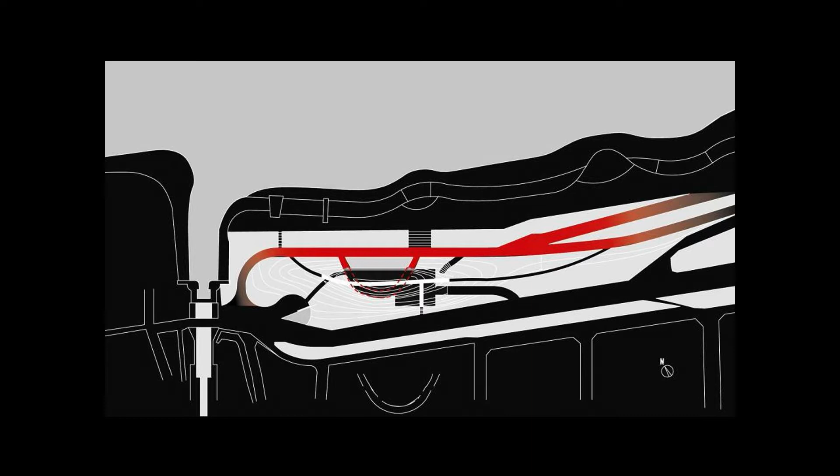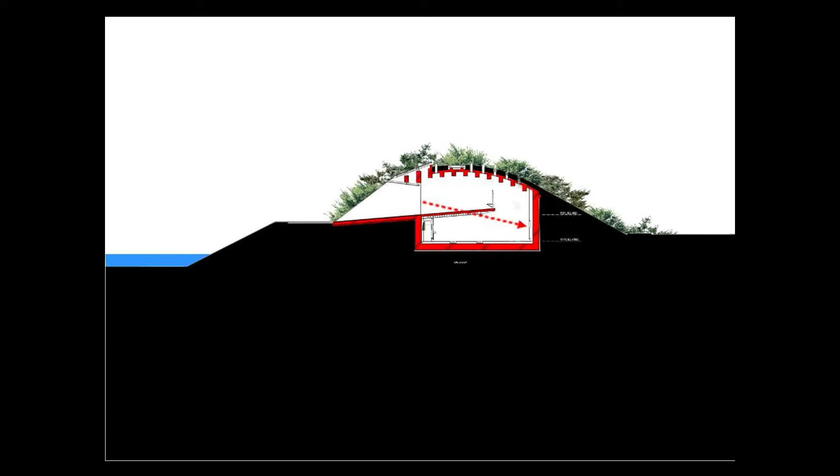The first project is a small museum, but it is difficult to find, because it is a small museum. Actually, half of the building was buried in the bank beside the river. The planning is very simple: it's a small tunnel, and the tunnel works like the museum. How to create harmony with nature is very important for this, because I didn't want to build a concrete box on this beautiful site.

The entrance is like that, but the problem is the taxi driver couldn't find the entrance, because I tried to hide it. At the beginning, even the taxi driver couldn't find it. They asked me to design a big billboard, but I refused. No, this should be quiet.

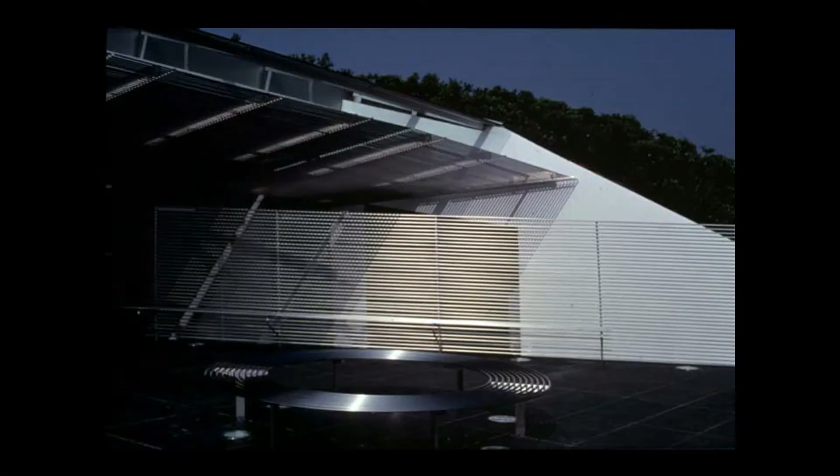This is the small plaza in front of the river, and this is the bottom of the building, a small exhibition space. I think the protagonist of the project is the river, not the building. The building should work as a frame for the river.

The next project is the Hiroshige Museum. Hiroshige is the name of an artist in the 19th century, an ukiyo-e artist. The basic idea for this museum is to use local material. The wood came from the forest behind the building, and I also tried to create a relationship with the town and the mountain.

The mountain behind the building is called Satoyama, a village mountain. It's a small mountain, but the village people's life was totally supported by the mountain. The material came from the mountain, and the energy came from the mountain. They couldn't live without the mountain. This happened before the 19th century.

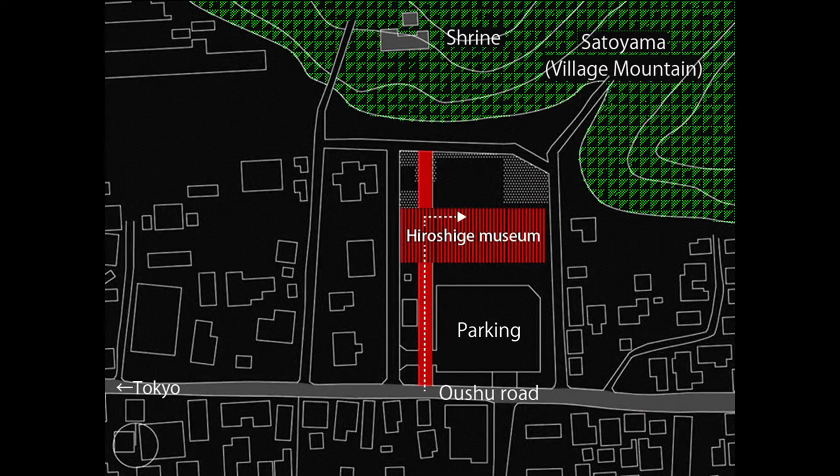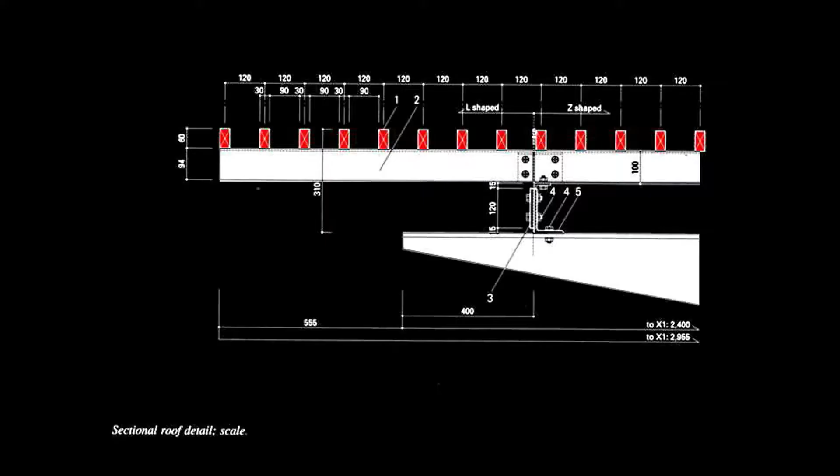Besides that, we tried to use local material as much as possible, avoiding material from Tokyo as much as we could. The wood came from the mountain behind, and for paper, we found a very good paper craftsman in the village. We worked with him to make the paper walls, and the stone came from the small quarry of the village.

The superimposition of those transparent layers was the theme of that design. And bamboo is a great material that I like.

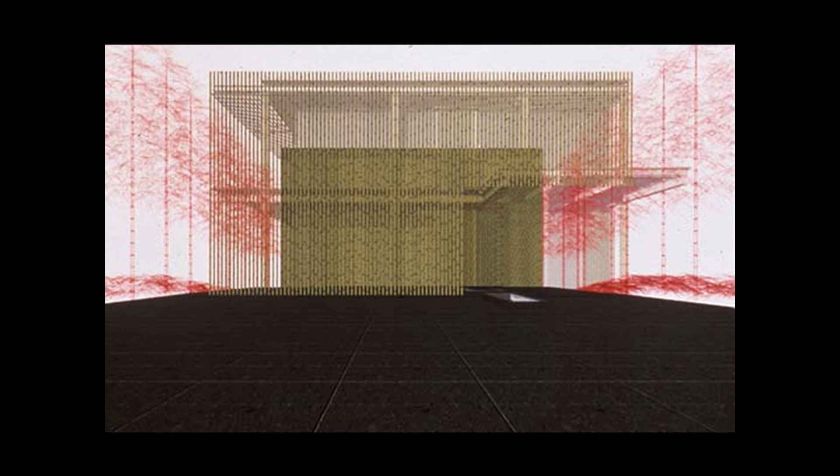It's a small bamboo house in Japan. It's a structural system, so we did use the bamboo for the formwork of the concrete. We injected the concrete into the bamboo, and we always test those mock-ups.

This is a small bamboo house. Forget the neighbors—for neighbors, typical Japanese houses, but forget it. The floor is like that. Walking on the bamboo is very, very comfortable.

The next project in China is a bamboo house besides the Great Wall. The Great Wall is behind the building. But at the beginning of the project...

I was worrying about the taste of Chinese people, because Chinese people like bigness. Still, Shanghai and Beijing are building big towers, but contrarily, I proposed a low silhouette building merging into the environment, and in that area I didn't cut the landscape. If we cut the land, the forest disappears. But I tried to keep the landscape as much as possible, and the bottom of the building follows the landscape.

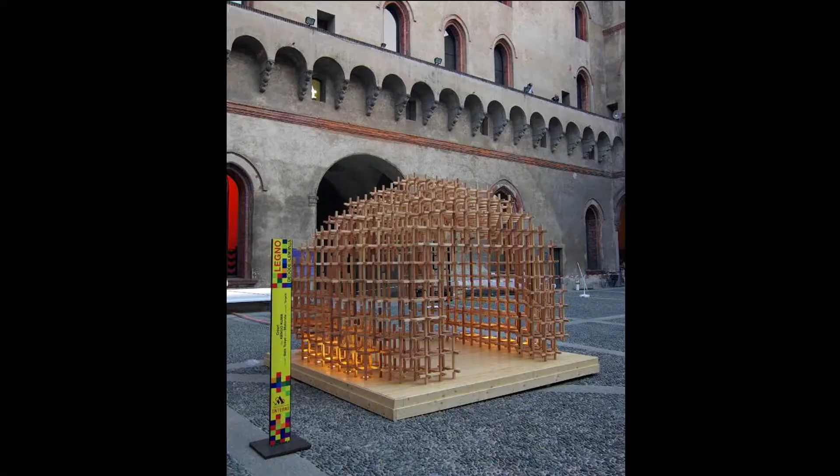In Italy, we did build a small pavilion, as I worked with my students, and the carpenters supported us very much. The inspiration came from a small toy from the mountainside of Japan.

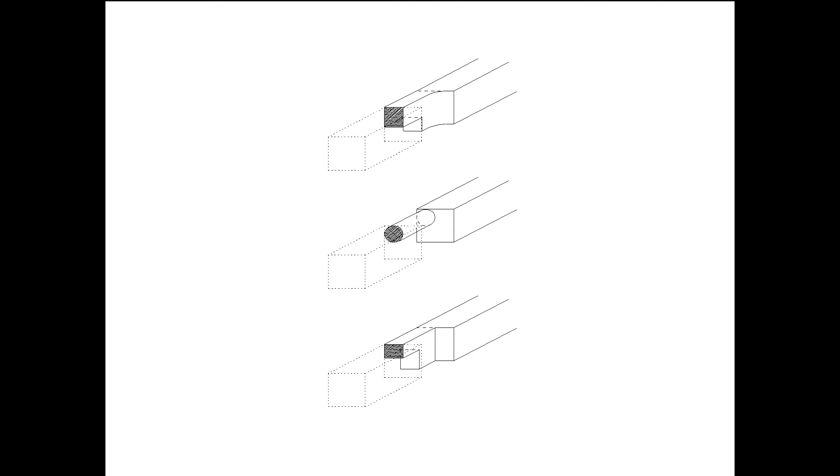This toy has a very, very smart joint system, with three types of joints. As we insert and turn it, we can finish this. So we prepared those sticks in Japan and brought them to Italy, and the people enjoyed that very much.

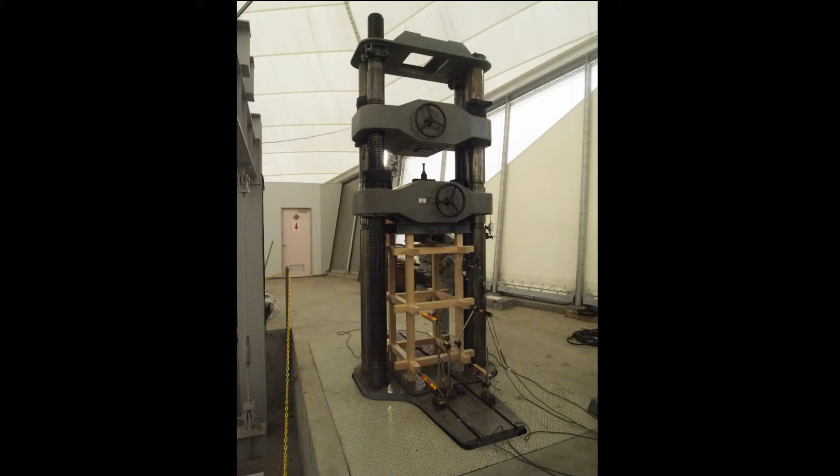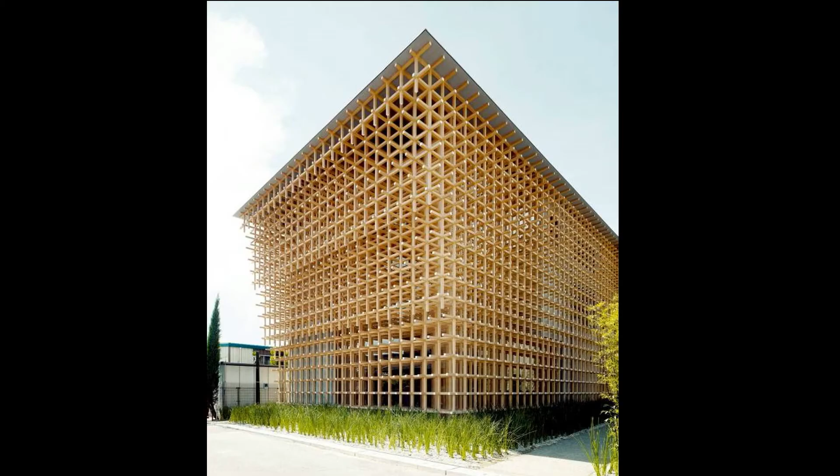After the experience, coming back to Japan, I tested the structural system to build a 10-meter-high building. But still, it's a small project. Finally, without any column and beam, we could make this with the sticks.

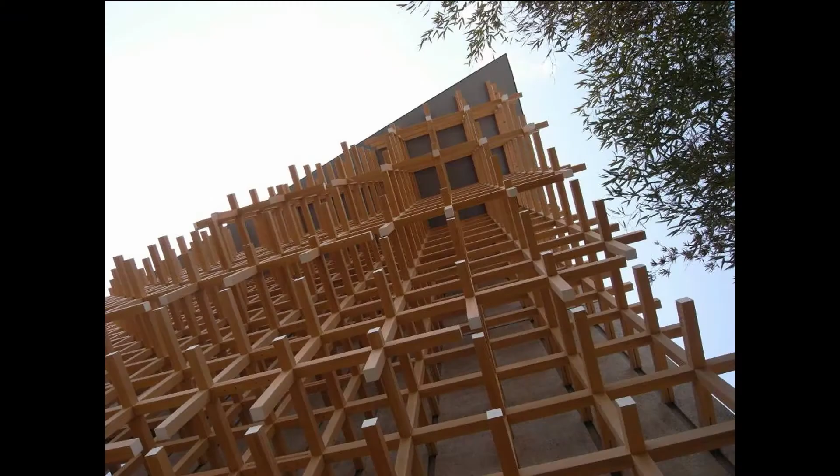The dimension of the sticks is 6 centimeters by 6 centimeters. It is very tiny, very light, and transparent. But those small sticks can make anything.

The shelves were made by the sticks, and the structure, shelves, and interiors are all integrated in that building. In the 20th century, everything was divided—structural engineers, interior designers, and curators were divided. But in this case, one single unit can make anything.

This is—look up at the ceiling, like that.

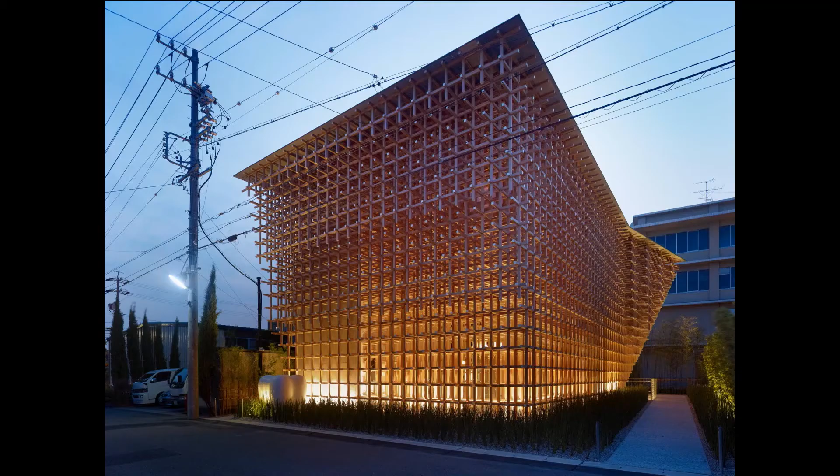Even for the big bridge, I try to use local material. This is a wooden bridge in Yusuhara. It's a deep mountain, and they could produce beautiful trees, but they couldn't find a way to use that beautiful wood. So we worked together to make this wooden bridge.

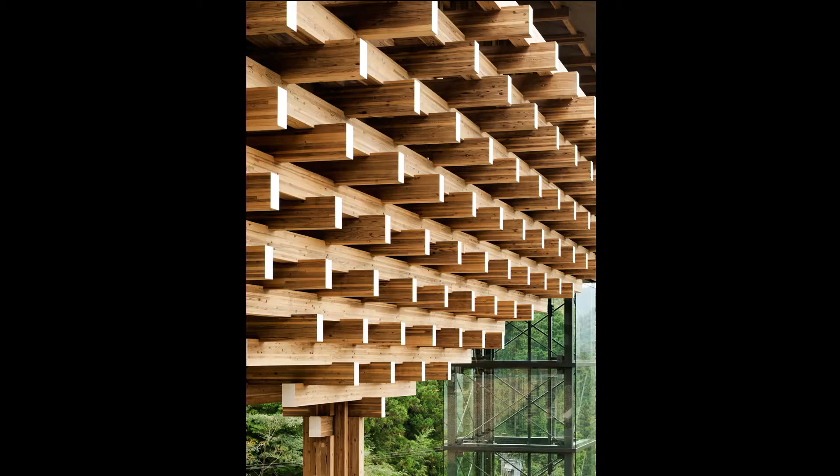This is the interior of the bridge. This bridge is also used for a small museum, and people can stay in the bridge—it works as a small hotel.

For the same village, we designed a small hotel named Marché Yusuhara. Historically, they have had that kind of small cafe serving tea to travelers, and they are still proud of that kind of hospitality. Thatch is a major material for this house, so we decided to use thatch for the facade of the building.

But it was actually very difficult to find an artisan. Before the Second World War, every small house in the countryside of Japan was built with thatch, but that tradition totally disappeared. For this project, I luckily found a very old artisan from that village—he's more than 75 years old, and he came back to work and join this project. I think architects should find that kind of chance to bring back tradition to contemporary design.

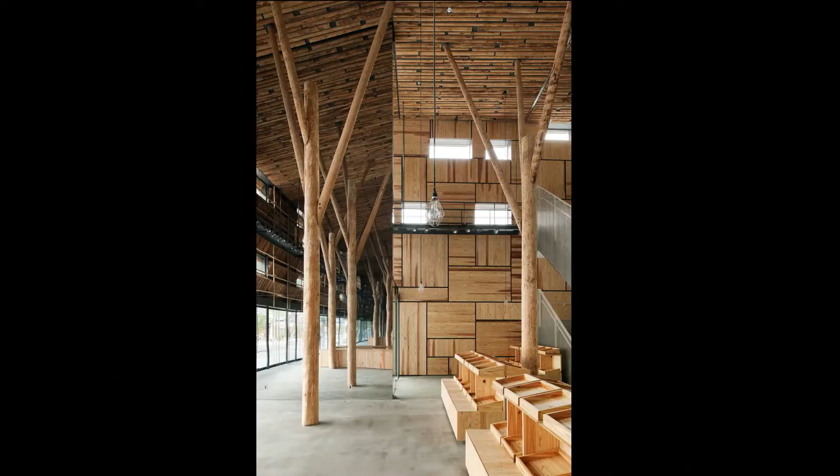This is the interior—they are selling local vegetables. Even for this kind of client, Starbucks, I proposed to use local material.

The location is in front of Tenmangu, Dazaifu Tenmangu—this old temple, in front of the Torii Arch. So we designed that Starbucks shop.

I want to show the artisanship to that kind of client, because normally they think architecture is architecture, interior is interior. But in that case, I tried to integrate interior, structure, and architecture—those small sticks are supporting the building.

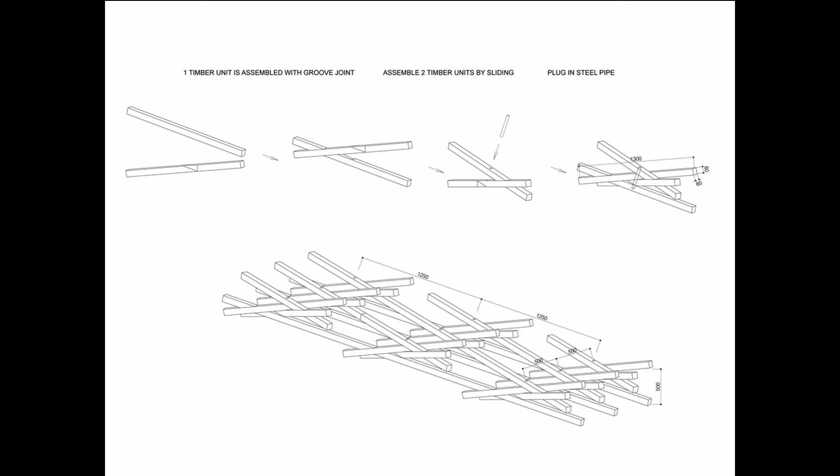This shows how to construct that building. This is the interior. Even for Japanese carpenters, it is not an easy project, as they thought very deeply about how to make the joint, and finally we could achieve it.

After Starbucks was done, a Taiwanese pineapple cake company, Sunny Hills, came to us. So we designed that building. And again, this is not the facade, this is the structure of the building.

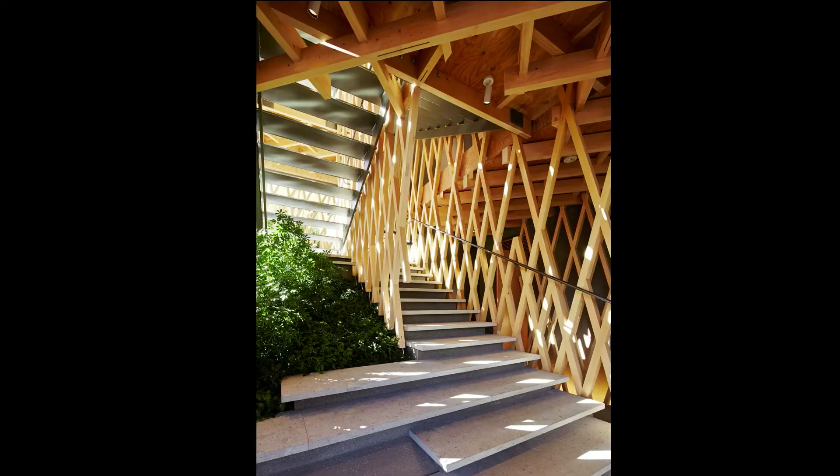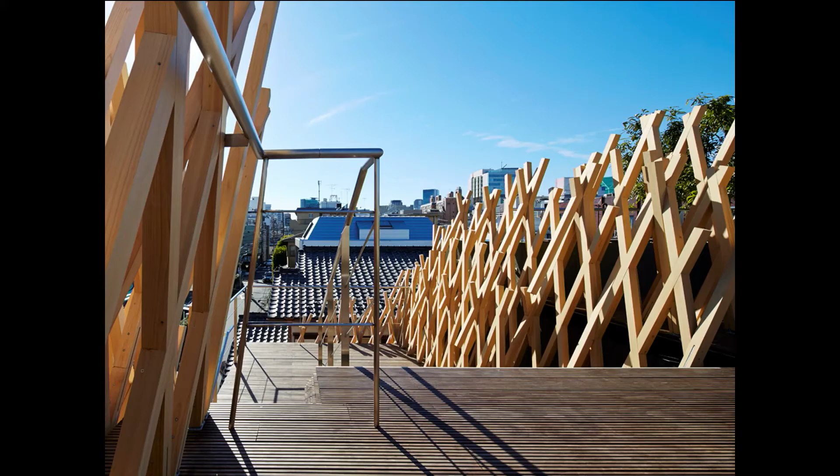Before the Second World War, we had this kind of craftsmanship, but now it's not easy to find the craftsmen, carpenters, to achieve this quality, because this building has no columns and beams. It's just small sticks that are supporting the building.

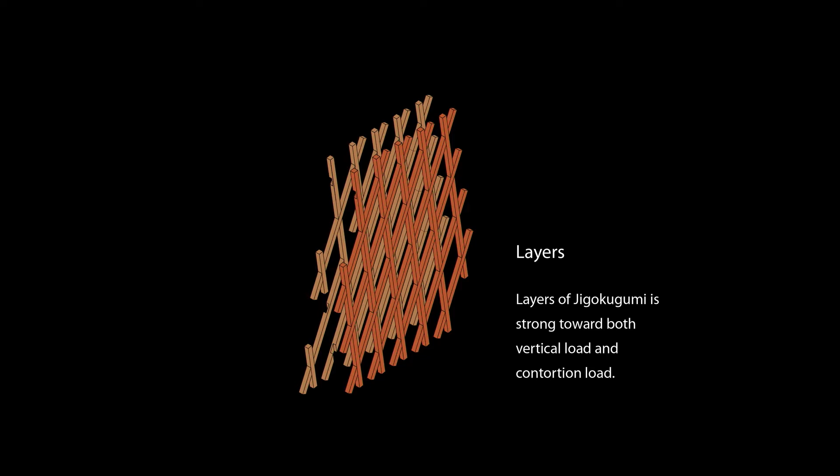The name of that joint system is called the hell joint. Hell, in Japanese we call it jigoku. The meaning is if we fix it tightly, nobody can take it apart. It's the same as hell. If we drop it, it never comes back, and then the system is so strong.

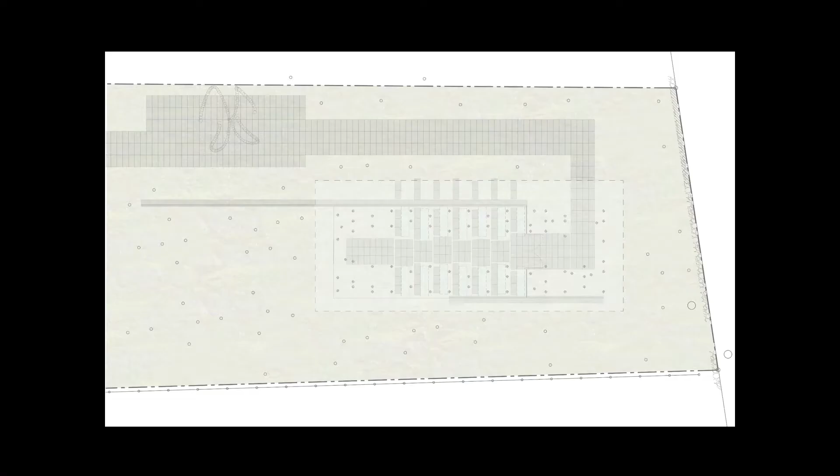This is a plan, and this is a section of the building. And if we look down like that, we can find the border between forest and building. But from here, the border disappears.

And so for the interior, we did design a transparent bench, and the exterior and interior are totally integrated.

And even for the big city, we try to make the smallness, but it's not easy, of course. In the center of Tokyo, there is a famous temple, and I like this temple very much because the towers are there, and the main building, and the long gallery, and the main gate.

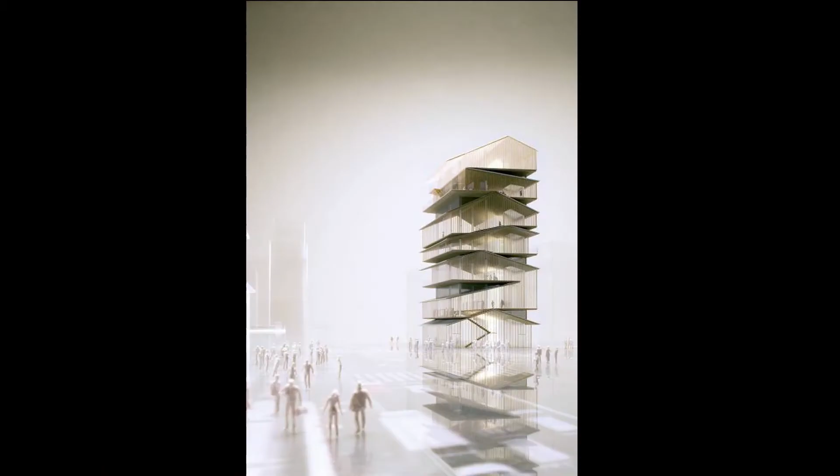It's because that area, Asakusa area, historically was an area for small wooden houses. So I try to bring that kind of beauty to this building.

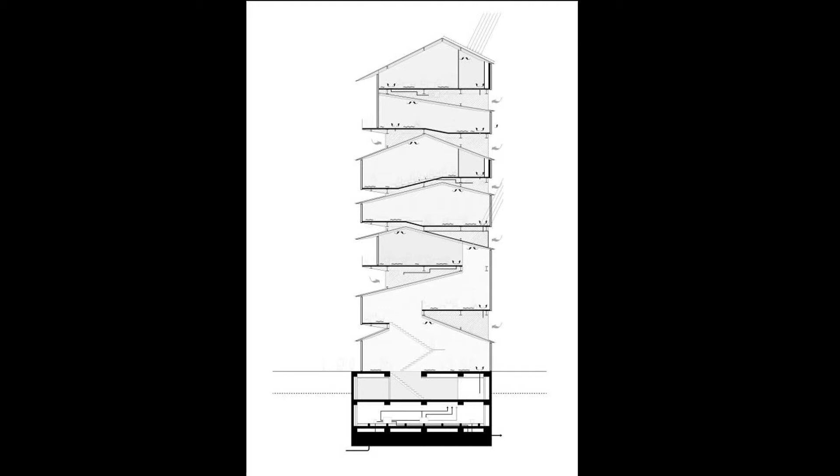This is a section of the building. Between the space between the floor and the roof will also be used for mechanical, and this is the rendering, and this is the reality. And we did use real wood for the facade.

And this is the small theaters. The floor is inclined because the roof beneath is also inclined.

The rooftop bars look down on the temple. To the left is the tallest tower in Tokyo, a huge tower, 600 meters. I try to create the contrast. The big tower belongs to the 20th century. In the 21st century, we try to seek to achieve smallness, even in the center of the city.

And in China, I mentioned that Chinese people like the bigness, but actually some Chinese people like to have smallness, and smallness in harmony with the environment.

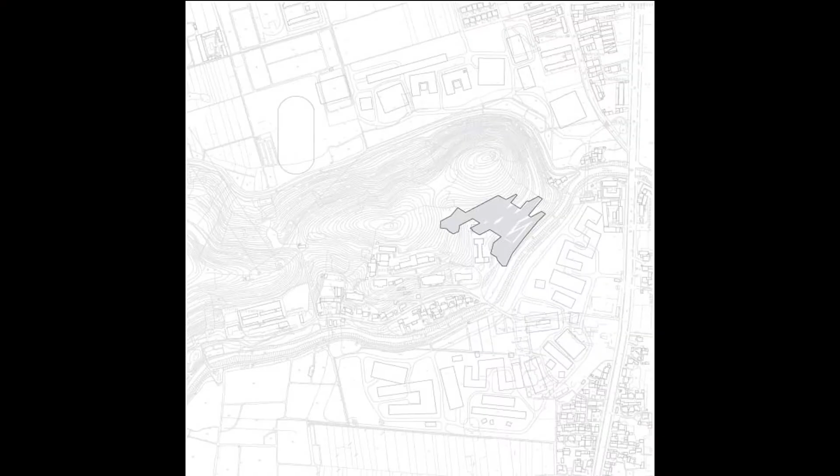This is a site. I try to follow the topography as much as possible. The topography has a slope. It is a one-story building, and the floor follows the landscape.

Many old houses were demolished, and we could get the roof tile from the old buildings. And I like the color of the old material.

Industrial material is homogeneous, same colors, same textures, but old, reused material has diversity. So I like that kind of diversity. And also we divided the volume into small segments, so we could achieve that kind of feeling.

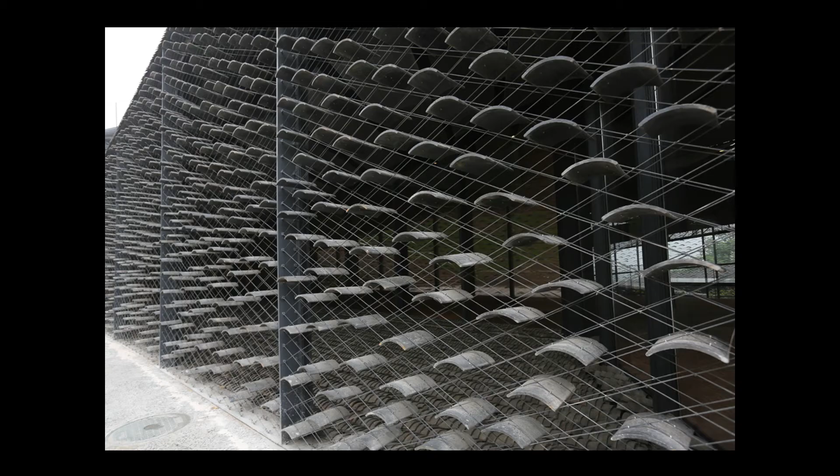The roof tile was used as a screen to control exterior and interior. And this is the interior, so the natural light is filtered like that.

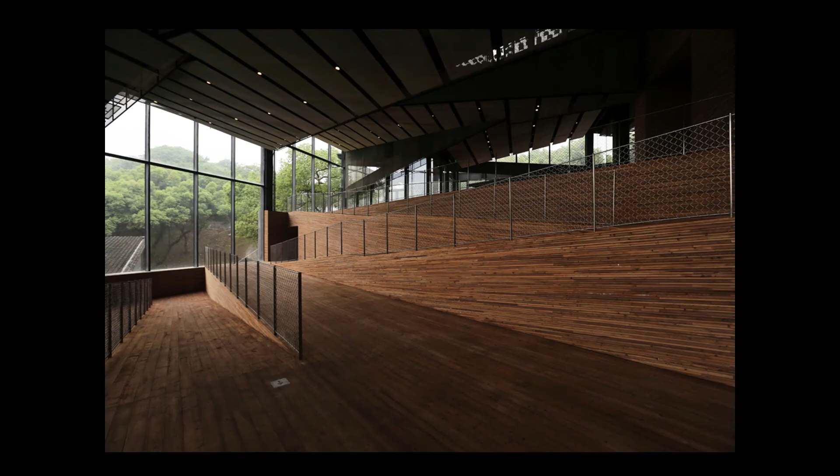And the floor follows the landscape, the topography, and also uses reused material, reused wood.

Many developers proposed skyscraper projects for that area, which is typical in China. But people were against those skyscrapers, and Western journalism and newspapers were against those skyscrapers, and finally even China changed its concept.

They decided to preserve the area and preserve the street, and they asked four architects - me, MVRDV from the Dutch, and two Chinese architects - to be in charge of that preservation.

And we try to combine some openings with the solid wall, because historically the street was very comfortable, but the street and the living were totally divided.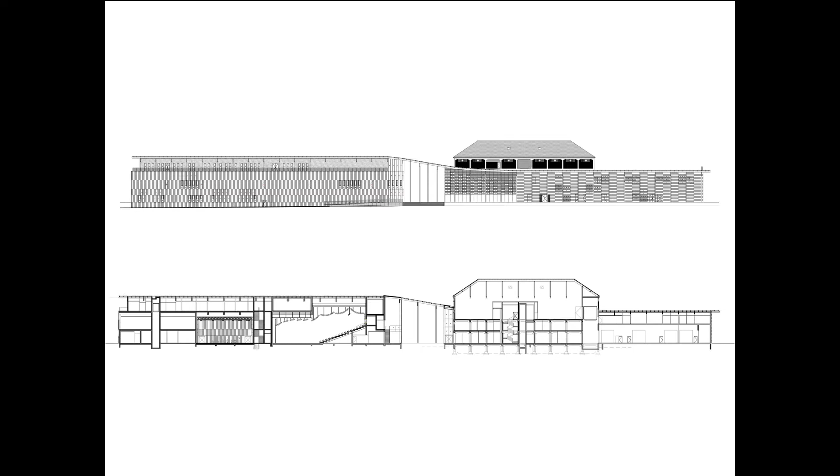And in Europe, we also try to achieve that kind of smallness. This is in France, a project in Besançon.

We decided to preserve the old brick building and add wooden structures to create harmony with the environment. We also designed the landscape beside the building. The wood came from the mountain behind, in that case larch. We also designed the landscape between the river and the building.

In Japan, this kind of semi-outdoor, covered space is called Engawa space. The Engawa is between the building and the gardens. I like that kind of semi-outdoor, in-between space. We also designed the biotope, the creek, and the Engawa.

So my idea is building should be part of the landscape and should be part of the city.

Another project in France is Entrepot MacDonald, but MacDonald is not hamburger. Please be careful — after Starbucks, somebody misunderstood this project for MacDonald.

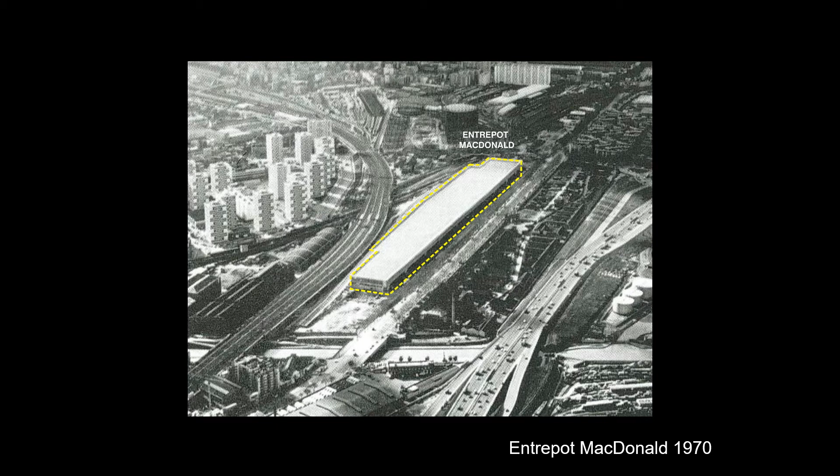But the story started from the 1970s, a big Entrepot. Rem Koolhaas did a master plan, and his idea was to preserve the 600 meter building and divide it into 6 pieces.

I was in charge of the west end of the complex, and other French architects wanted to build concrete box on concrete box. So they built the boxes on top.

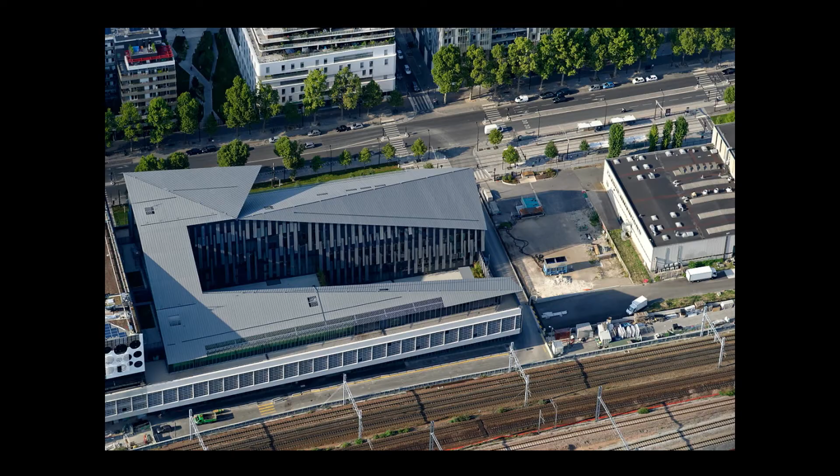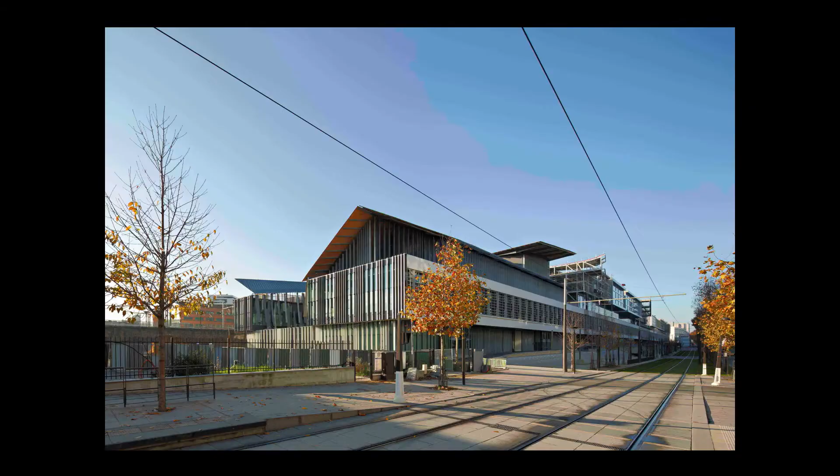But my part is, I wanted to create a roof to make harmony with the neighbors. The roof can also create a kind of semi-outdoor space. It welcomes the people, and also welcomes the kids of the area.

This is a semi-courtyard, and the kids like that kind of space.

As for material, I used wood for the roof, because even for a big city like Paris, I thought wood is necessary. The wood can create lightness, transparency, warmness, and an intimate scale.

After that, we designed a station in Paris. The area, Saint-Denis, is north of Paris.

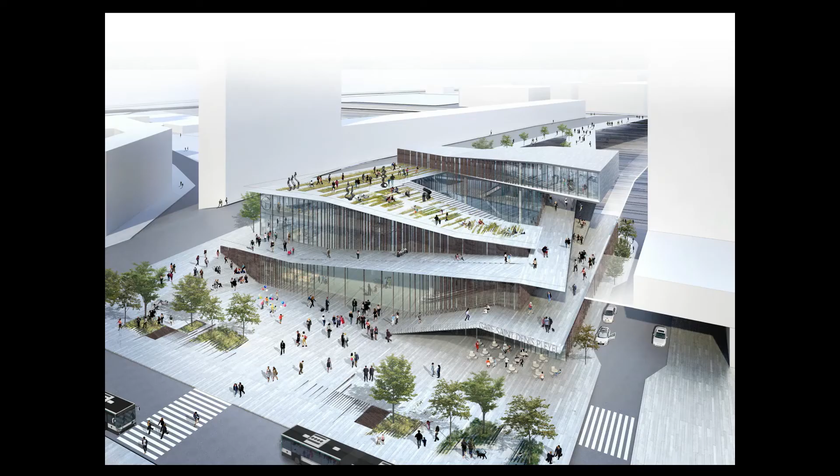It's not a safe area. The terrorists — you remember the terrorist attack in Paris — they were living in that area. Syrians, immigrants from those countries are living there, and it's not a safe area.

And the city of Paris wanted to build a new type of station, open to the community, with community space. They didn't want to make another concrete box.

Our proposal was to create a park connected with the area, and we also used vegetation and wood for the interior.

But at the beginning they said no, wood was too risky — this district is a very dangerous district with terrorism and graffiti. We found a very good treatment to avoid graffiti on the wood, and finally they agreed to use wood for the interior of the station.

In Spain, we are designing the opera house in Granada. Granada is famous for the Alhambra Palace. The geometry of the palace is very different from the square, rigid geometry.

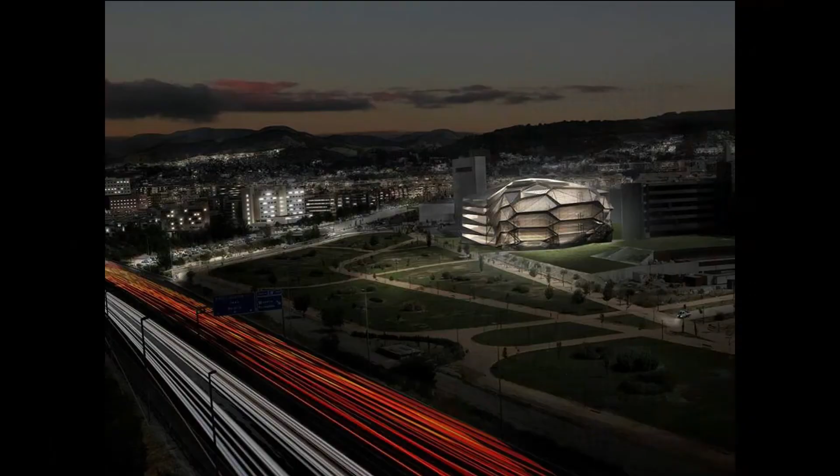I tried to make it like the pomegranate fruit — the name Granada came from that fruit. I was inspired by the fruit.

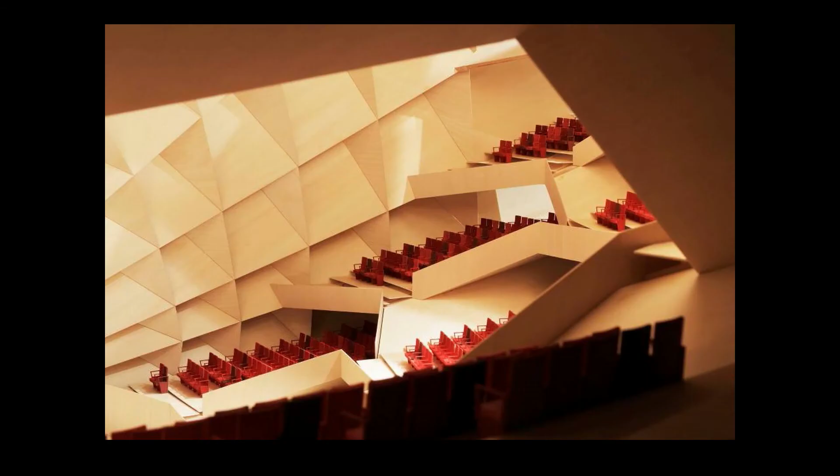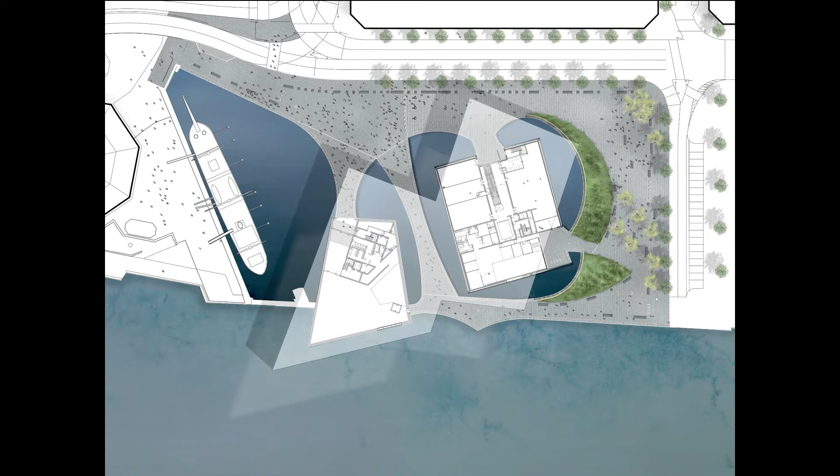My first sketch tried to integrate the building with the river. I tried to create a kind of man-made cliff which can be merged into the environment.

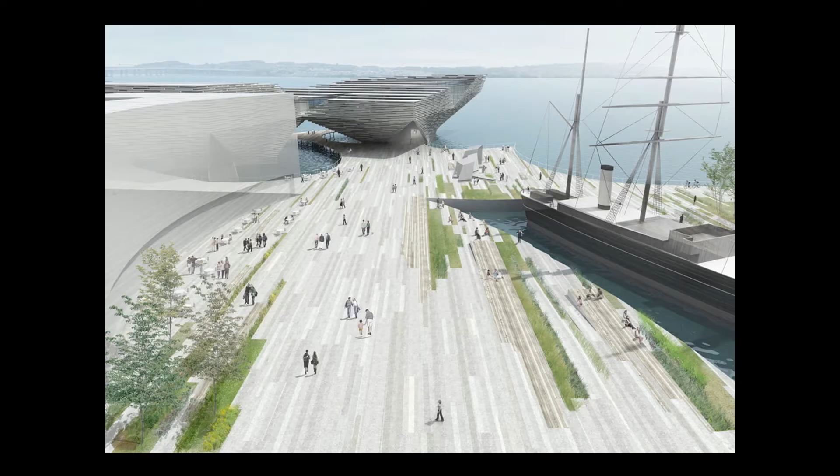As a wood, again, Scottish oak is used for the interior.

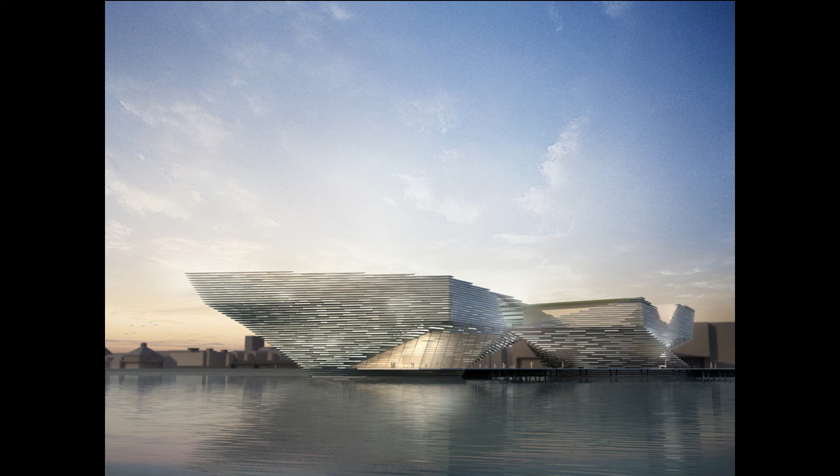Besides those bigger projects, which are not easy for us, I prefer smaller, experimental projects with new materials, sometimes natural and sometimes new. This is a small pavilion made by a very unique material.

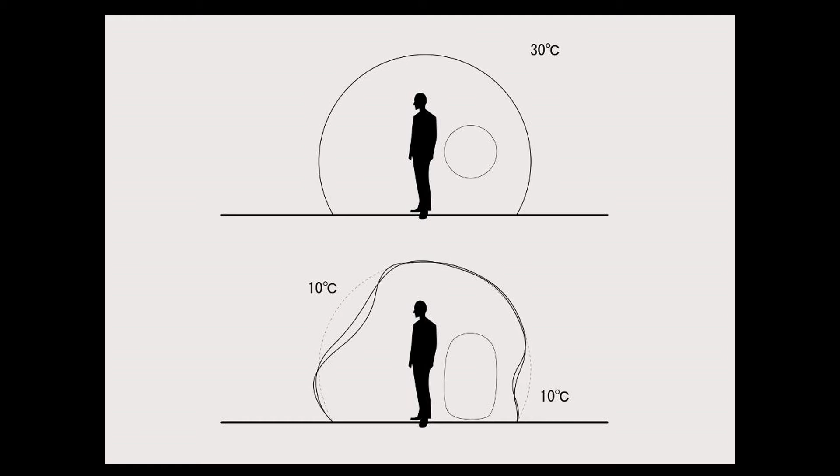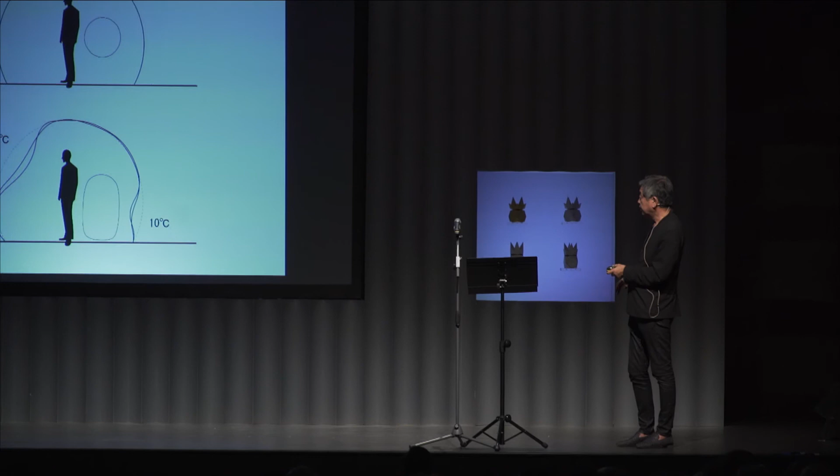It's shaped by memory alloy. The character of that shape memory alloy is that it changes shape following the temperature. If the temperature is high, the metal becomes very hard and rigid. If the temperature drops, it becomes very soft. This is very similar to the human body - it's always moving.

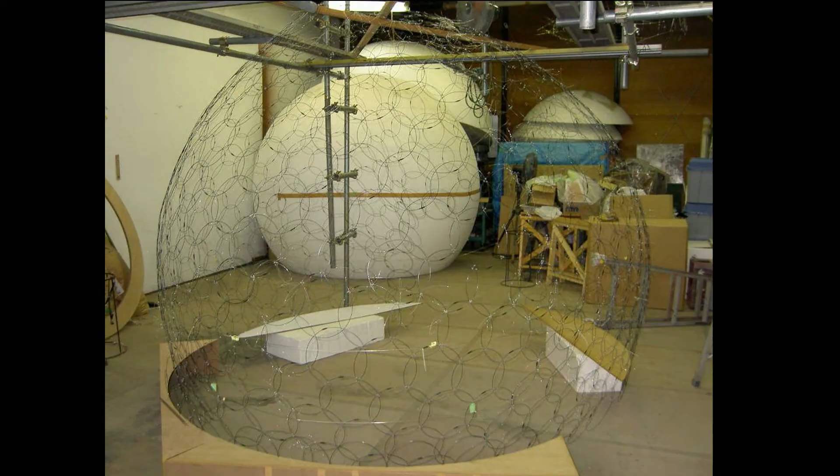So structurally, we should make very soft structures because it should move, it should be flexible. And it's very, very transparent, like that. This is a small door to the pavilion, like a Japanese tea house.

As the next project, we used umbrellas. You know the Fuller Dome by Buckminster Fuller - I like his idea very much. But my concept for this small pavilion is to make the pavilion from a daily commodity, the umbrella.

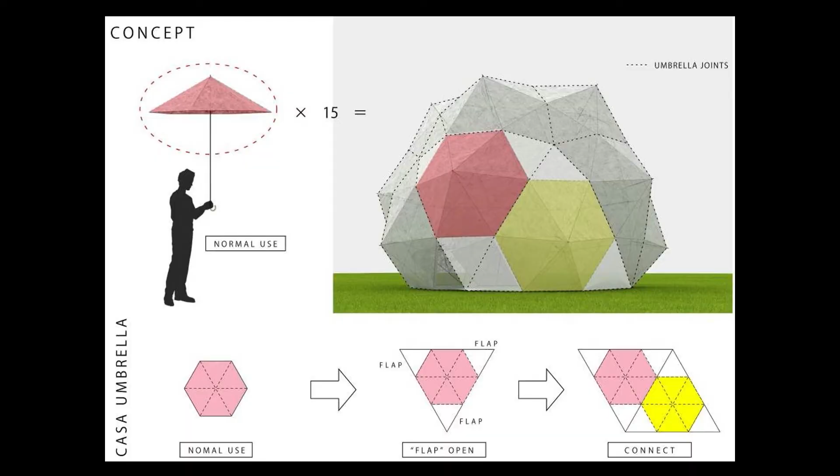So if I can make the pavilion by the umbrella, it can work if an earthquake happens - if earthquake happens, we can escape with the umbrella. And if we can find friends carrying that umbrella - I think it's not easy - 15 friends can make the pavilion together.

So actually, I worked with 15 students in Milan, and they built this pavilion by umbrella. The interior has that size - very transparent and very light.

The joint, as in Buckminster Fuller's idea, is made by metals, but my idea is joint by zipper. So I prefer the soft joint - you can see the waterproof zipper used to join the umbrellas. And this is a small door.

And after it was done, my students wanted to stay, drink, and sleep in the pavilion. 15 students could sleep here.

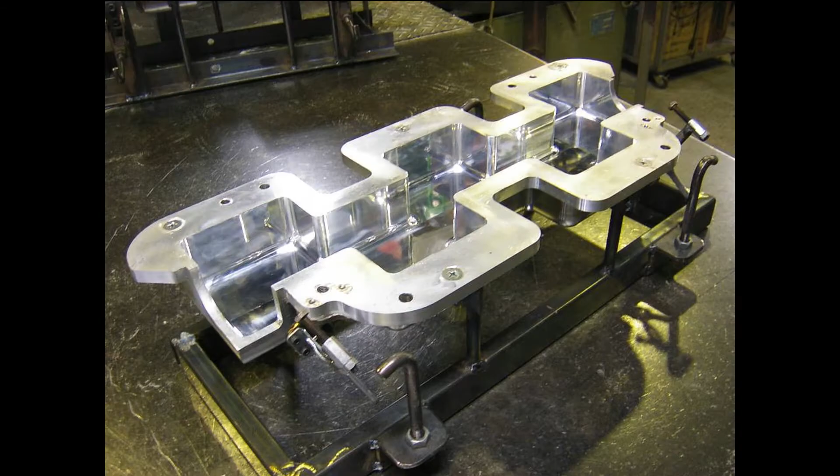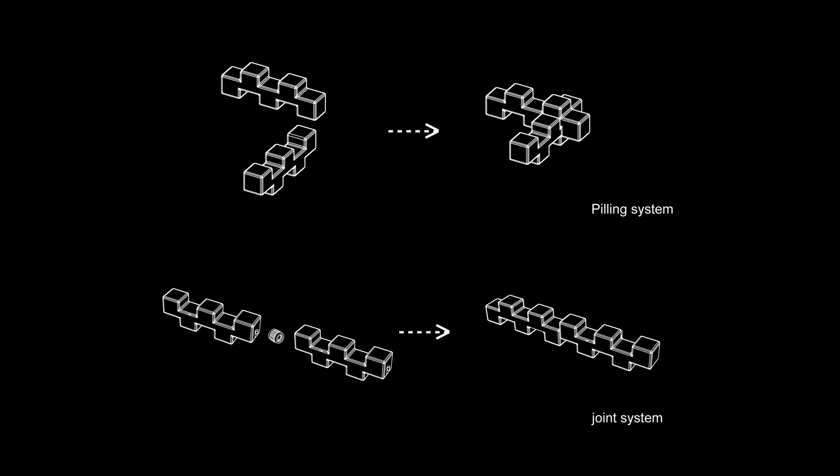And there is the process of making the special polytank. My idea is the tank is a kind of cell of the body. The liquid is flowing in my body, and in the same way, the liquid can flow in the tank.

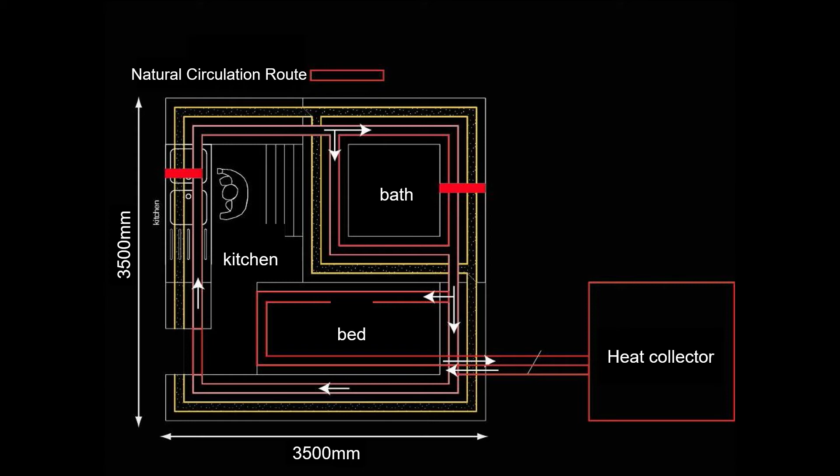This is the New York Modern Museum that exhibited the tanks, and we designed a small experimental house where people can live. The heat collectors sit outside, and we can get heat from the sunlight to heat up or cool down the house, and the water is circulating in the cells.

Our students, again, worked on that project. The water is flowing in the tanks. This is the completion of the house.

It's a small house, but people can live in it. The bed is very small - even for Japanese, it's too small, I thought. But the kitchen and bathtub are all made by the same unit.

My dream is like the human body, where one single cell can make anything, and liquid is always flowing in the body. I got the inspiration from the system of the human body. This is the interior.

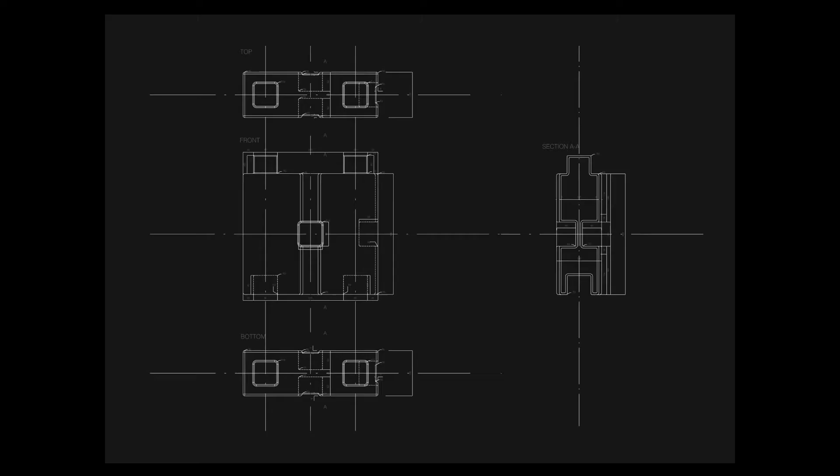After that project, I built a small tea house in Beijing, using the same idea - the polytank. That is this building, next to my house. This is not just pictures.

This is the Forbidden Palace in the city of Beijing - it's just next to the Forbidden Palace. And this is the interior.

Always, after one project, I try to bring that idea to the next project, because what I can do in one project is very limited. But if I can continue to work on the same idea, we can step up to the next level.

In this project, the interior is like that, and it is just next to the Forbidden Palace, which is a preservation area, so we needed to preserve the silhouette of the roof. Finally, we could achieve that project.

It took 4 years, because making the polytank in China was not easy, and getting permission was also very, very difficult - it took 4 years. But it's worth spending 4 years for the small project. It's a combination of the Forbidden Palace and the rooftop gardens of the polytank house.

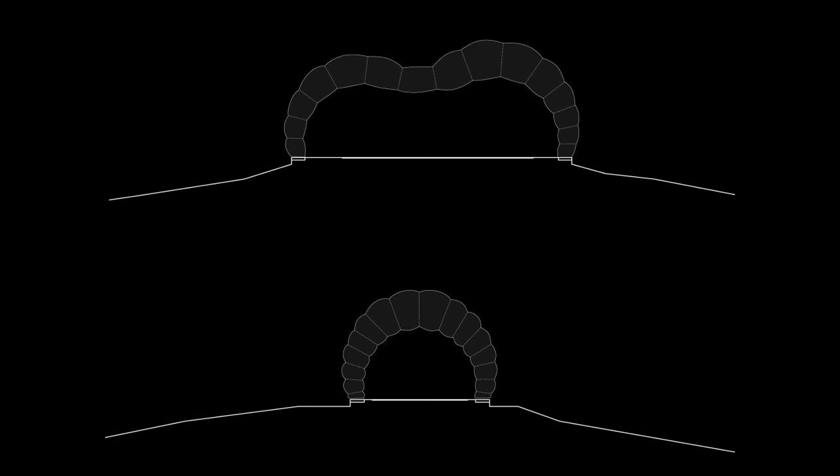This is the plan. It's a double skin membrane structure with that interior. The tatami mat is here. It's a combination of tradition and new technology.

We brought that idea to the exhibition at the National Building Museum in Washington. It's a floating tea house with membrane. We tested the things. The students worked together, always.

After that, in Hokkaido, we built the membrane house again. We got a hint from this.

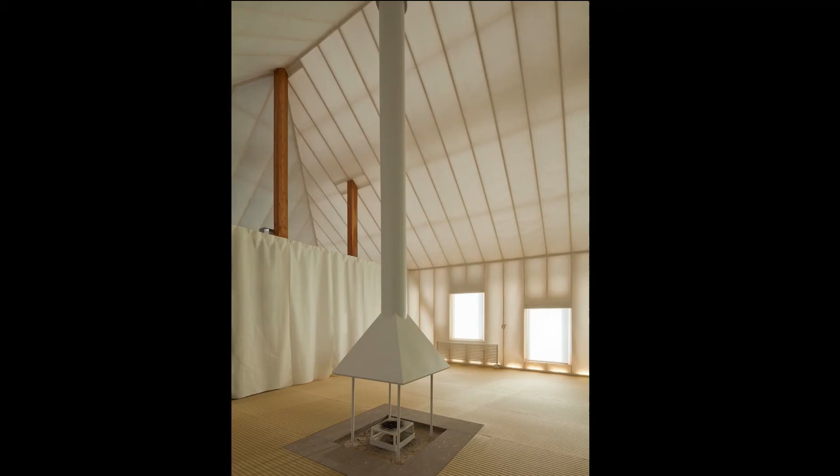House for Ainu people. Ainu people were living there in Hokkaido, an ethnic, small ethnic group. The house was so beautiful. They used bamboo leaves to cover and warm up the house. My idea is that without any concrete structures, we can live with nature, with soft skin.

In this area, as it becomes minus 30 degrees or so, we achieved that building using a special air circulation system.

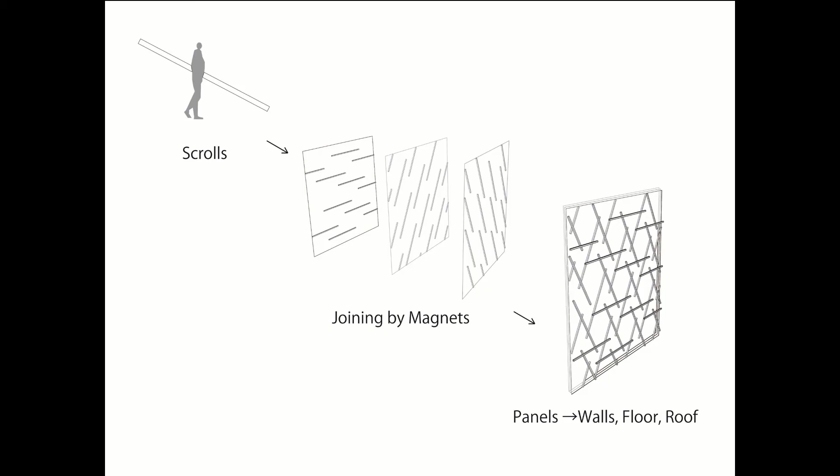And the new tea house in Kyoto used a magnet joint system. We recently found a very strong magnet, and three layers of cedar scrolls that can be fixed by the strong magnet system.

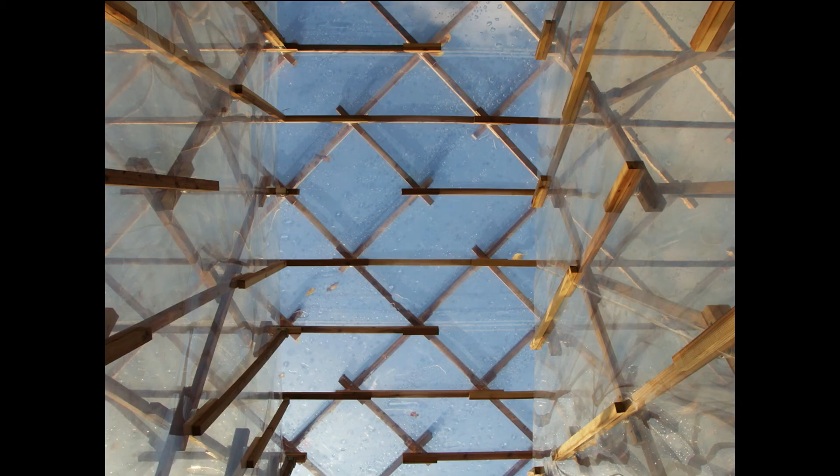As a membrane, I feel it's a very comfortable material for the soft human body. Concrete is too cold, too heavy, and too strong for the human body. That is my idea, and I try to find the softest material possible.

There's a project for an exhibition in the UK. This is a very light structure made of bamboo sticks.

Getting smaller as we go, this is a trailer house, a wooden trailer house we designed recently. In the 20th century, America invented the trailer house, but it's still very industrial, very hard, and I don't like that kind of house. So this trailer house was made of wood.

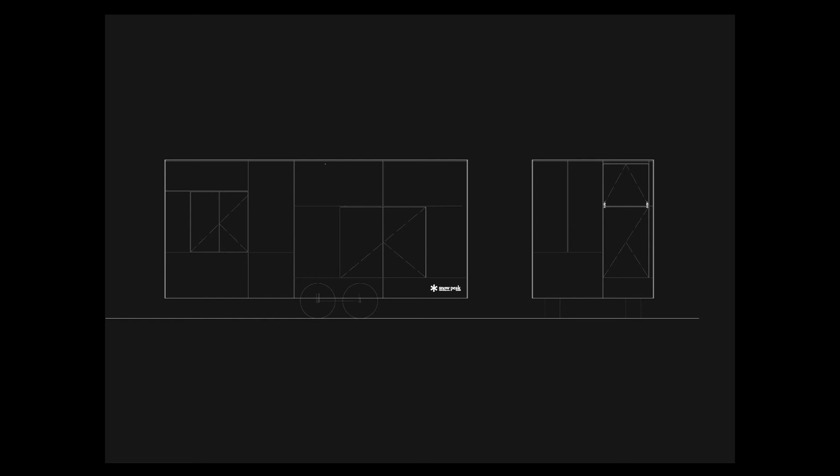At last, I want to show the smallest project we designed. It's the TSUMIKI project.

You know, musician Ryuichi Sakamoto runs an NPO named More Trees. Those forests in Japan are facing very bad conditions. Nobody wants to use Japanese wood because it's very, very expensive, and it's a very bad situation. Sakamoto's idea is to use wood from Japan.